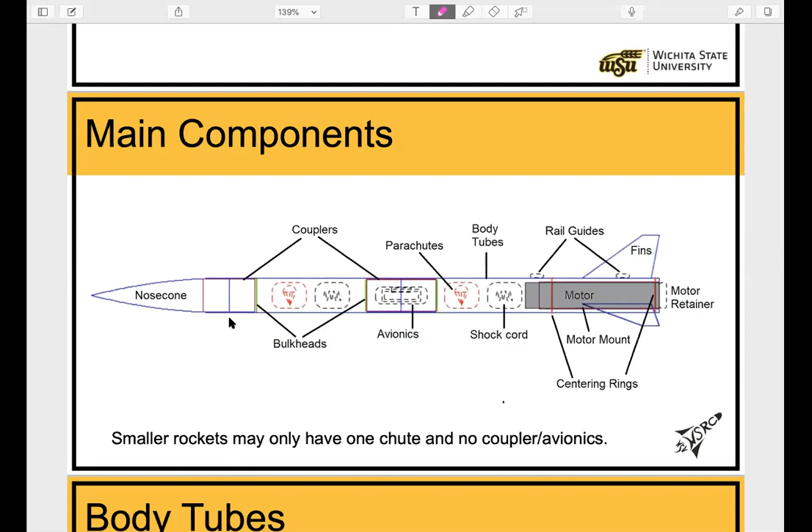All right, so structures and airframe. So these are some of the main components that every rocket has. So this is a traditional dual deployment setup. It has a nose cone and a coupler that is attached to the nose cone. It is removable from the fore section of the airframe. I just realized I can use this pen. Okay, can you guys see everything on the screen? Yeah. Okay, yep. So this would be the fore section, and this nose cone slides into that fore section right there.

And the avionics bay is pretty much just a coupler that fits into the aft section, or the booster section, which is that. That's the fore section, that's the aft section. Yeah, so these are pretty much the main components. Every booster section would have a motor tube, so that you can fit the motor in it. We would also have centering rings to keep the motor centered, so the line of thrust is aligned with the rocket, and you're also going to have a bunch of fins on the rocket. This is in order to keep your center of pressure behind the center of gravity.

So this avionics bay is attached. Usually, it's attached to the fore airframe. So you're going to have a bunch of screws in here that would be attaching this coupler avionics bay to the body tube. And the way the booster section or the aft section is attached to the avionics bay is via shear pins, which break off when the ejection charge fires. And the nose cone is also attached to the fore airframe using these shear pins.

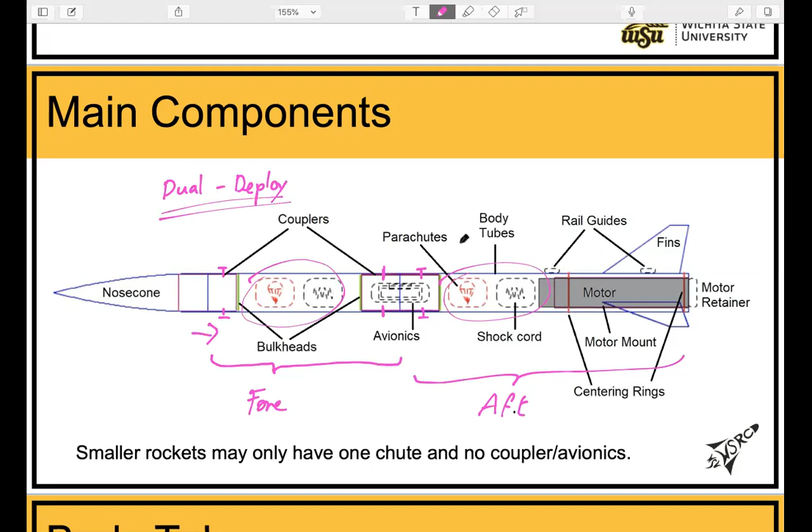Okay, so yep, this is a traditional dual deploy setup, which means there are two sets of chutes, usually the main and the drogue. And we usually put the main in the fore section, not in the aft section, just because it's a little heavier and you want to keep the center of gravity further up. Although I have to mention that pretty often the aft section has a lot more space, so that's something to keep in mind.

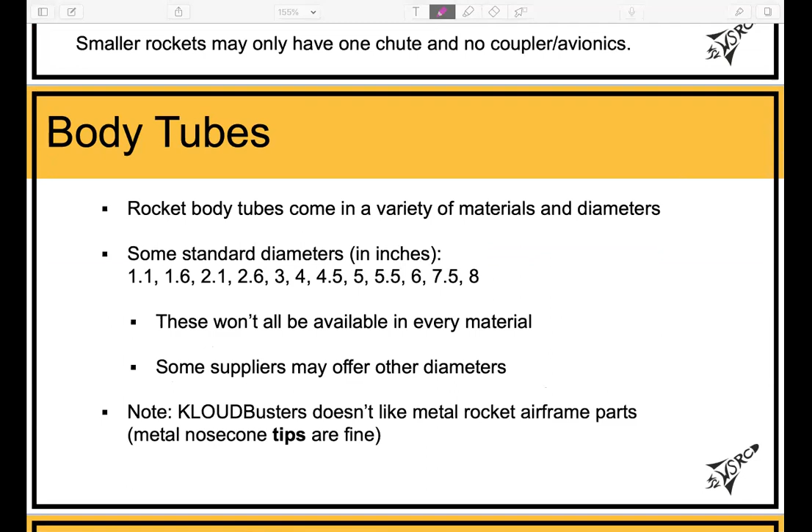So on the body tube, most rockets that you see here in the lab are in the range of 3 inches and above. I think what's his name again? Scott? Is it Scott's Black Arrow? I think it's like a minimum diameter, about 2.6 inches. My rocket. That sounds right. Yeah, mine would be a 4-inch diameter rocket, and I have it here with me. I can show it to you. So yeah, 4-inch diameter. If you really want to put a payload in it, whether it's a glider or a drone, you usually want to go 6 inches and above.

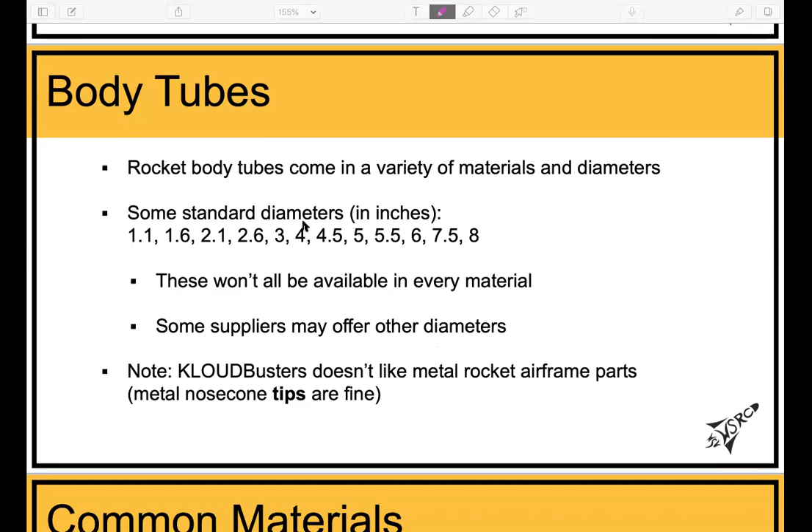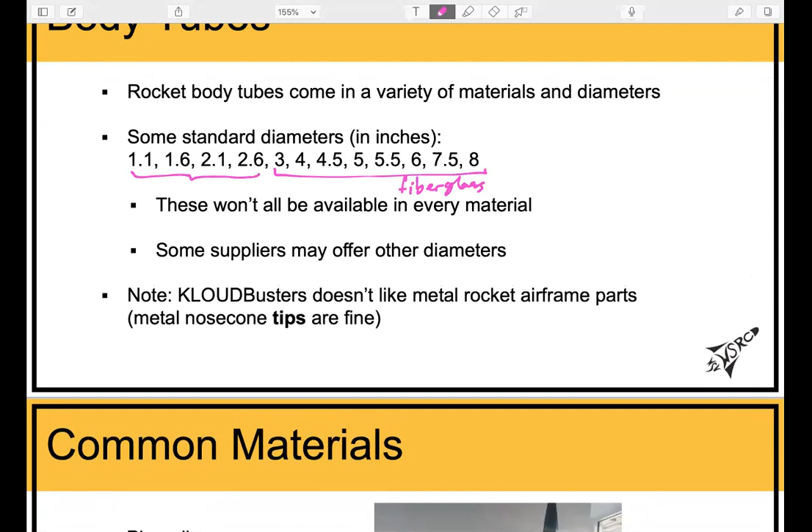And usually the larger diameter rockets, I would say 3 inches and above, could be found using fiberglass. And some of the smaller diameter ones are most probably cardboard. Cardboard, yeah. Also, KLOUDBusters doesn't like metal rocket airframe parts. So no metal body tubes, no metal airframes.

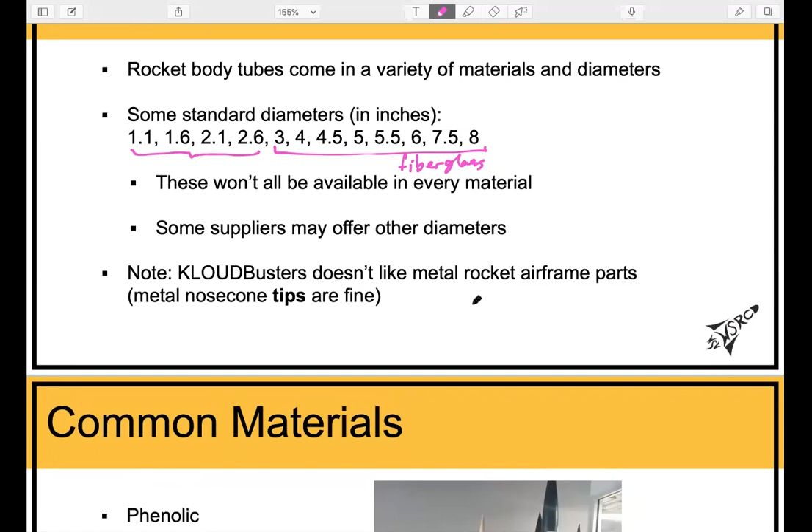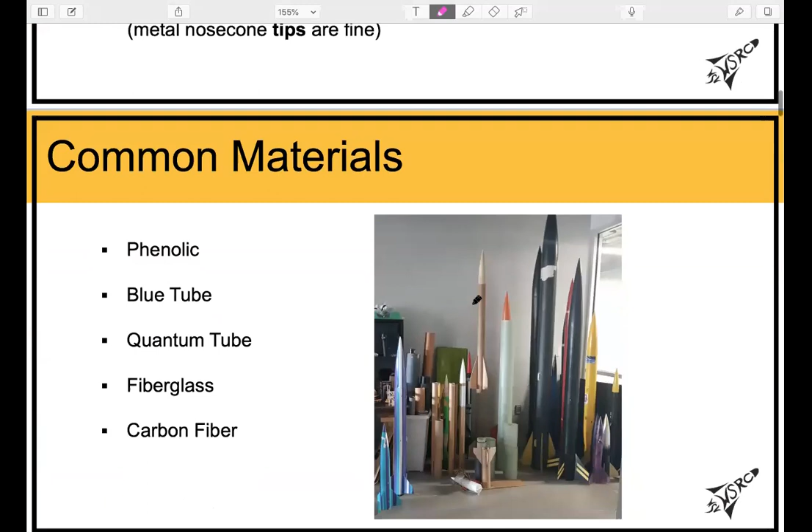I think we have one rocket here in the lab that belongs to Tarun. Do you guys know Tarun? He was part of the very first FLI team here from Wichita State University, and his rocket had metal fins on it. I should ask him. Yeah, KLOUDBusters hated it. Yeah, so this is, again, just some of our rocket lab, our astronautics lab.

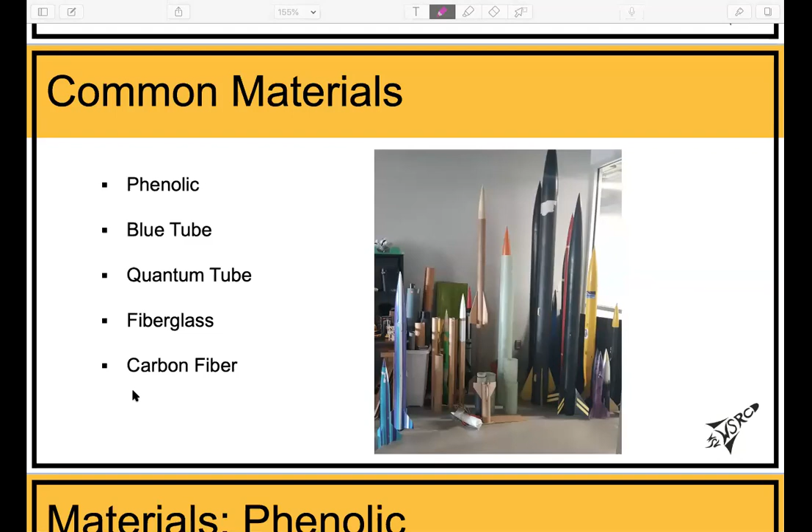So here are some common airframe materials. So phenolic tubing. Is there more? Yeah, here. So these are used for smaller subsonic rockets, and they can be used for motor mounts as well. They are cheap. As you can see, they kind of look like cardboard. So they're a lot easier to cut, a lot easier to paint, and much more affordable compared to fiberglass or carbon fiber.

They're also a very good base, which is what I'm planning to do with my level 3. So you can use this as a base, and you can lay up fiberglass or carbon fiber around it, as opposed to just buying a filament wound carbon fiber tube. So that's also one of the advantages of it. So it can be used as an airframe on its own, or it can be used as a base material for your fiberglass or carbon fiber rockets.

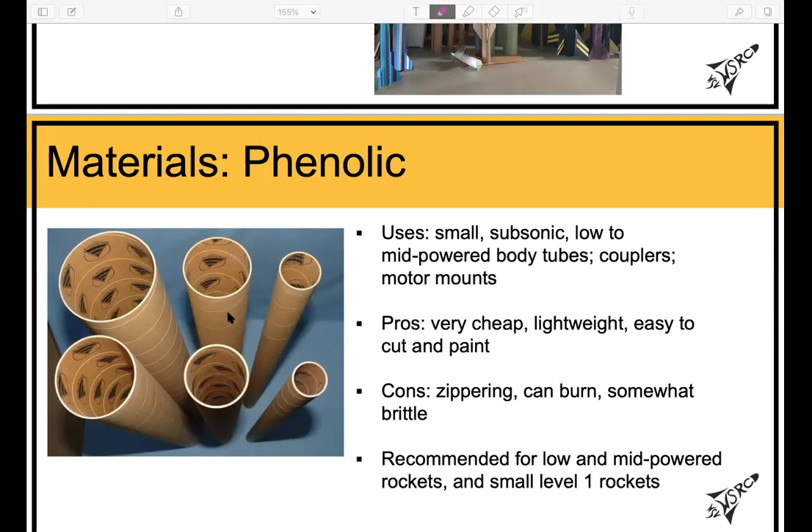Oh, next we have Blue Tube. So are you familiar with this one? Because I'm not too familiar with it. If you want to explain about it. It's basically tougher phenolic. It was used a few years ago. We've still got some in the lab. If you look around the materials, there's some lying around there.

Oh, I think I see some of them. Yeah, it's just literally the blue phenolic. It's tougher, sturdier. I think they bill it as like 5 times tougher. It's pretty good overall. You might actually consider using that as your base. It'll be a little bit heavier though than phenolic, but it is a lot sturdier. Well, I'm trying to break the WSU altitude record, so maybe you might go with something lighter.

So again, just to reiterate, the pros: it's cheap, easy to cut, lightweight, it's sturdy. Some of the cons: zippering. So if some of you don't know what zippering is, basically the airframe would have a shock cord passing through it. That's how we tether all of the different components together. So you would have a shock cord

that goes through. And sometimes if your parachute gets deployed when your rocket is descending at a very high velocity, the shock cord can actually rip through the airframe. So you would get a rip right in here, and your shock cord would basically penetrate through the material. So that's what zippering is. There are some techniques that you can use to avoid that.

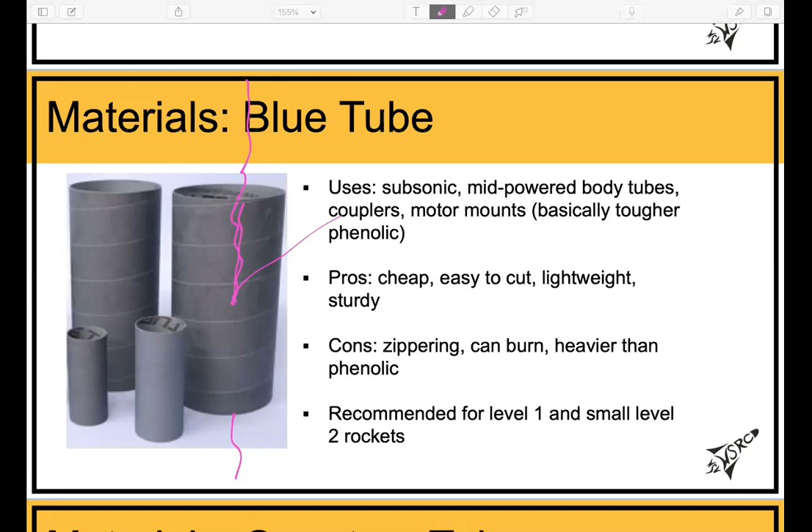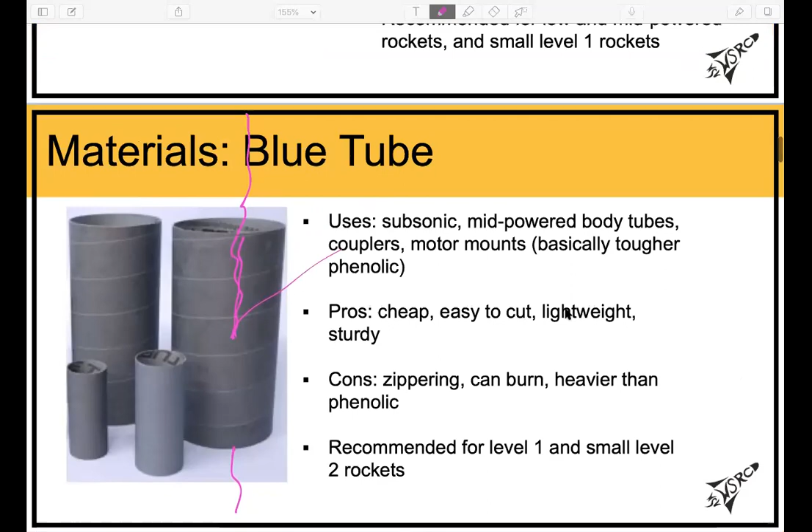Usually doesn't happen on airframes that are a lot stronger, such as fiberglass or carbon fiber. And they can burn. And like I said, they're heavier than phenolic. Phenolic can burn too. It's all cardboard. Well, not technically, but. And next is Quantum Tube.

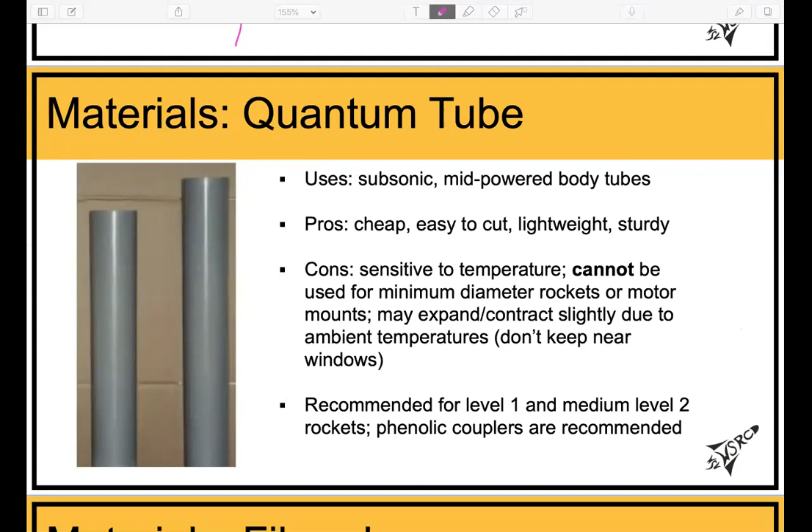So again, they're definitely a lot stronger. They're used for subsonic rockets, but I think Scott's Black Arrow rocket, he used Quantum tubing, and that rocket went supersonic, I believe. Yep, they're a lot cheaper than fiberglass, carbon fiber, a lot easier to cut as well. You don't have to wear respirators like N95 masks and all that fancy stuff. You're not gonna get as much intense dust during the build process.

So some of the cons is that it's like strong PVC. Yeah, right. So when I first came to the Rocket Club, I was looking at some of the rockets that had Quantum. And I was like, is that PVC pipe? Because it really looks like it. But yeah, it is like PVC pipe, but it's a lot stronger than it.

Okay, we're on to fiberglass. So these are pretty much, assuming your rocket is not going ballistic or anything, these rockets pretty much last forever. They are extremely durable when it comes to drilling, and compared to phenolic or cardboard, you're not going to get as bad of a blowout if you drill through it.

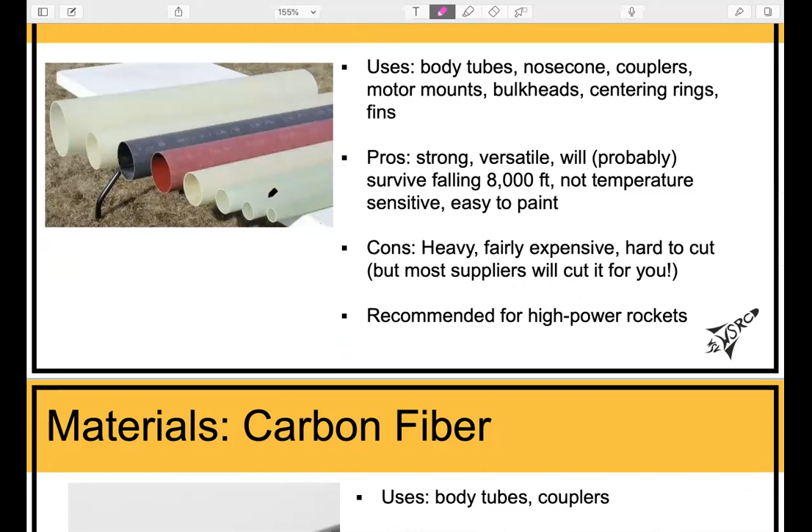And these materials can be used pretty much for the entire airframe. So you can use them for the motor tube, the bulkheads, the aft and fore airframe, the nose. They can be used for everything. I pretty much used that for the entire airframe. And I have time-lapse videos that I can show you guys later because I filmed the entire build. Wow.

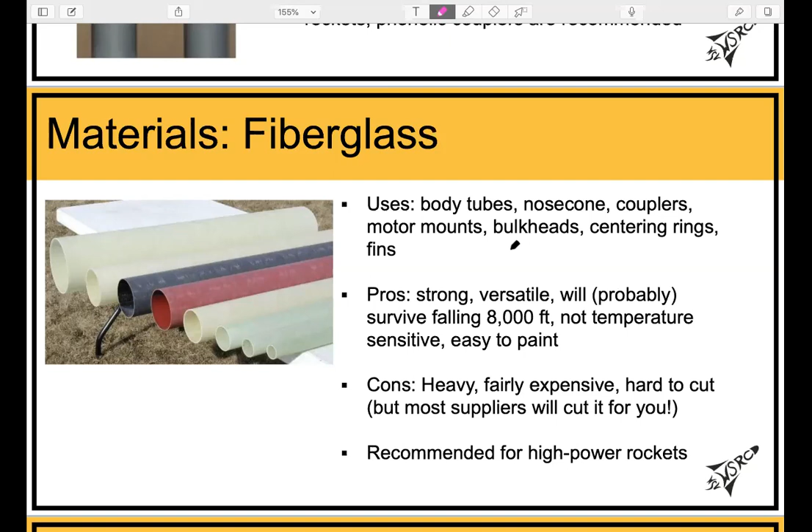They are fairly expensive. For example, the airframe that I got for my level 2 rocket, I got it off Madcow, and the total price came pretty close to about $400, and that's for a 4-inch diameter airframe, 4-inch diameter nose cone, 54 millimeter motor tube, and I got the fins cut out by Public Missiles. They are another company where you specify the dimensions of your fins and email them. They'll give you a rate, and they can get it shipped to you pretty quick.

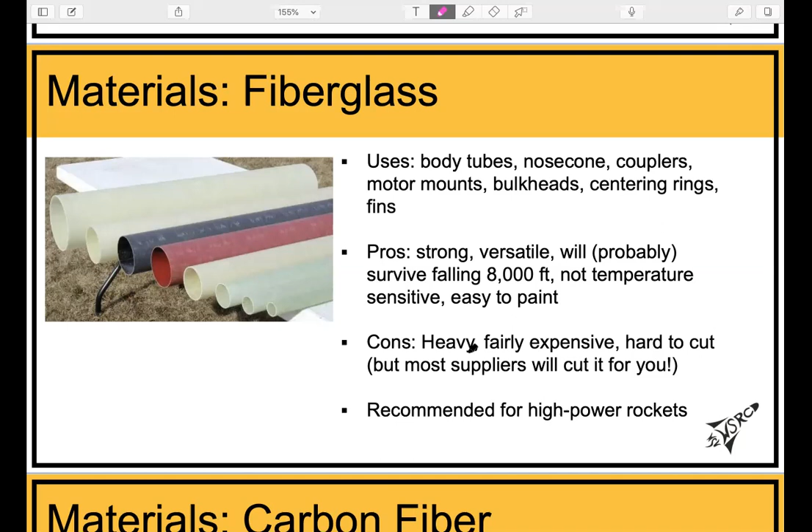So almost all high-powered rockets that are 5, 6, 7, even 8 inches in diameter use fiberglass, at least as the structural component of the airframe. Then finally, we have carbon fiber. So again, if you want to lay up carbon fiber or fiberglass, the process is pretty much the same.

These are available filament wound as well, and you can lay it up as well. They can be used for pretty much any part of the airframe. Madcow has them. Your motor tube, forward airframe, aft airframe. They can be used for fins, nose cones, pretty much everything. Incredibly expensive. I haven't done too many carbon fiber rockets. We have one here in the Rocket Club.

Was that part of a senior design project? Was it? Yes, yeah, it was. You know how much that one ended up costing? Or at least just for... $10,000? I don't think it was that much. I don't remember the exact number though. It was a while ago.

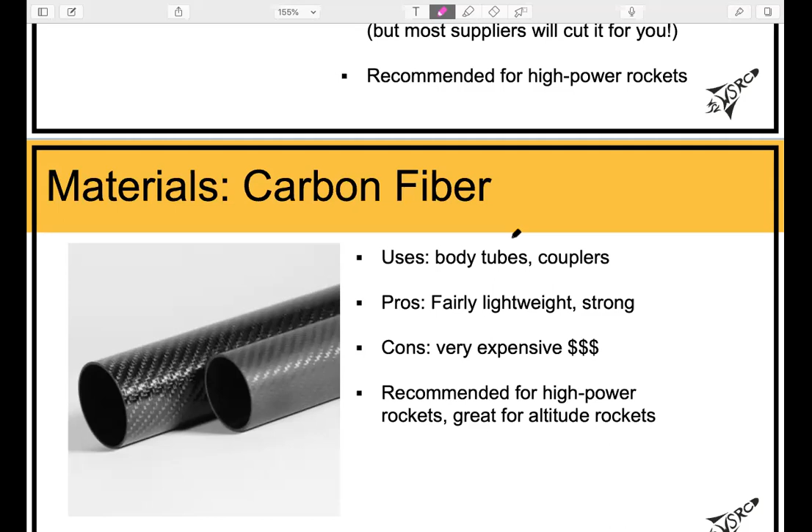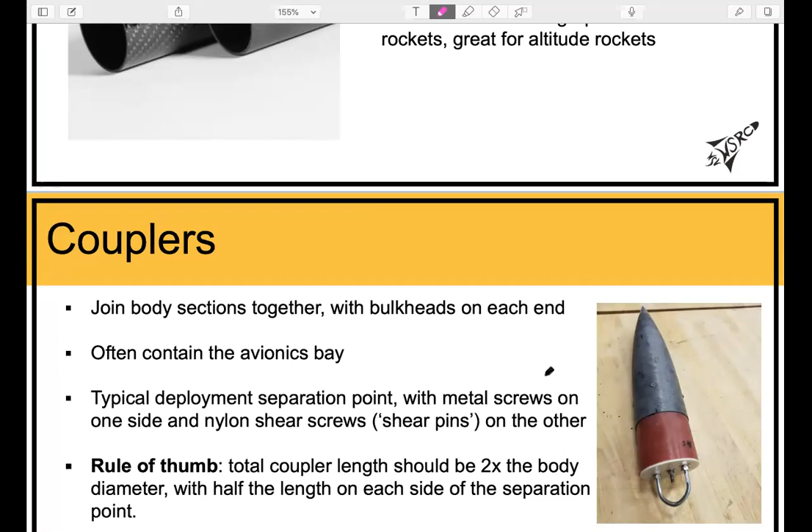That rocket was launched before anybody who's currently in the club ever joined the club. It kind of just stands there now. Still our flagship rocket, or at least the main thing we kind of show off here in the astronautics lab. Yeah, that's the current club record for altitude, 16,500 feet. So, just bring it over. Yep. Again, recommended for some of the most high-powered rockets that you can imagine, great for altitude rockets.

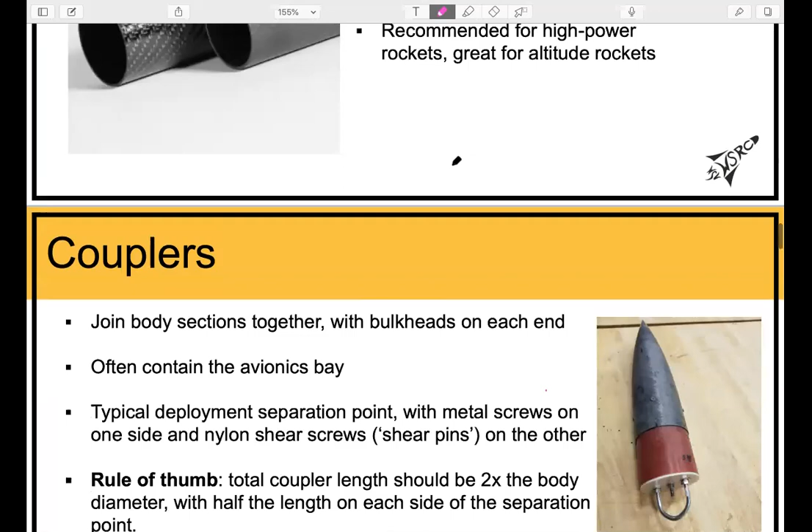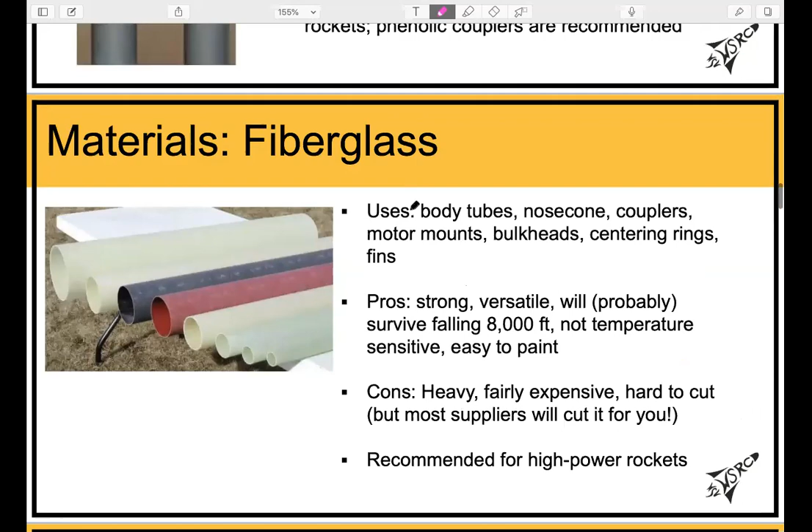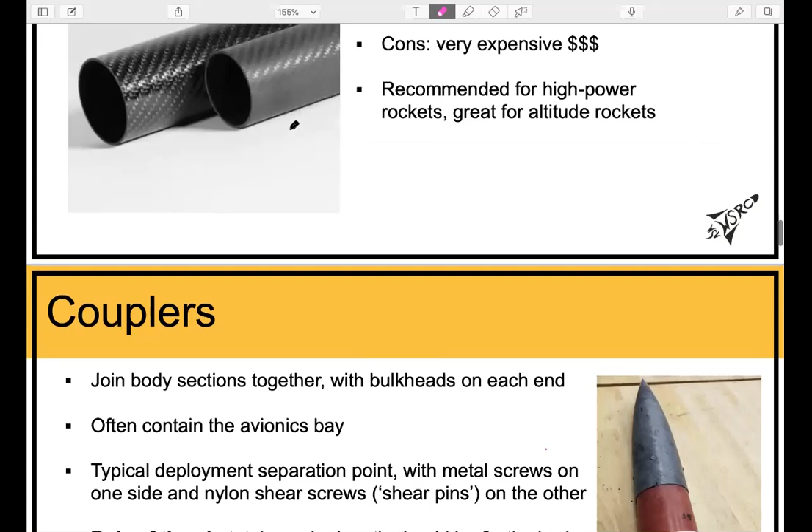My favorite airframe material, I would say, is fiberglass. It's relatively affordable, and assuming you're not gonna fly like Mach 2 or Mach 3, it should do just fine. So, fiberglass can do above Mach. It's pretty good for those. Yeah, they can go above Mach 2, but if you're gonna stay at that speed for a really long time, I think carbon fiber would be a better option. Well, carbon fiber is always a better option. It's just nobody has the moolah for it.

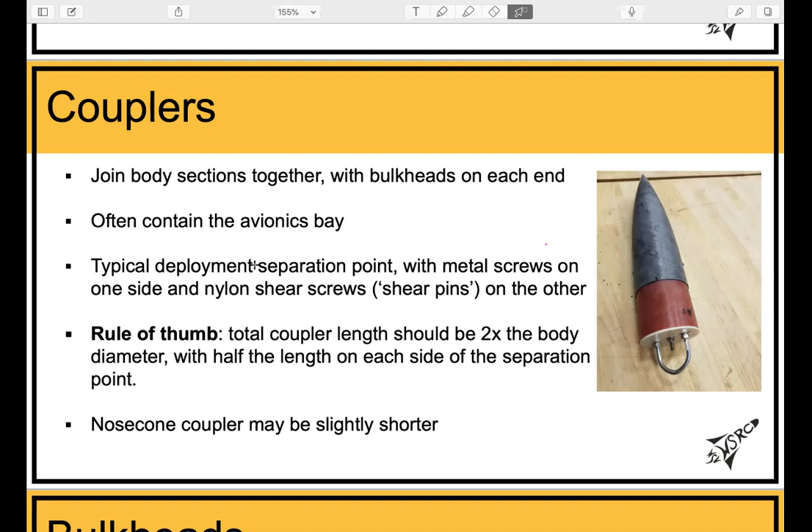So here we're gonna talk about couplers. Again, as the name is pretty self-explanatory, you join body segments together, bulkheads on each end.

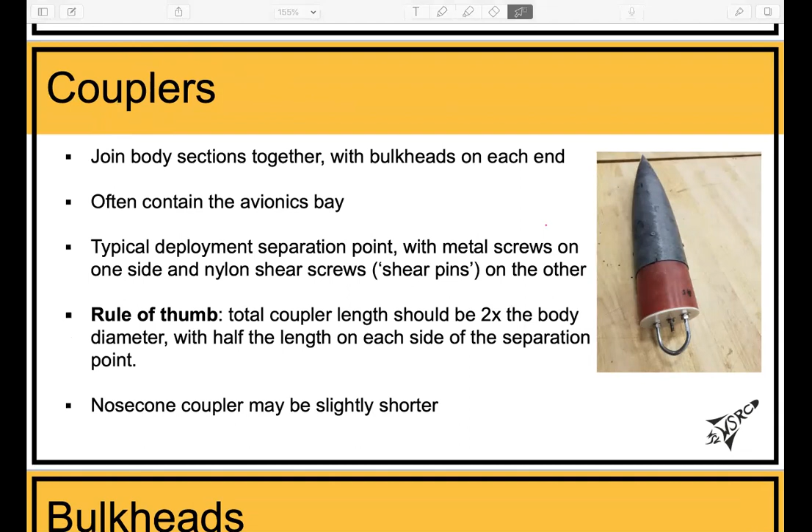So can you see? Are you seeing the screen, or can you see what's on camera? We're seeing couplers. Okay. We can see your screen on the side, if that's what you're asking. Oh, so you can see both of them at the same time. Right. Nice. We only see the couplers slide.

Yep. So, coupler. Pretty self-explanatory. They are used to join different rocket sections together, and each of them have a bulkhead on each end, like this one right here. This is the nose cone. That's a bulkhead, and it is attached using the all-thread, the threaded rod that passes all the way through from the nose cone tip, the metal tip, all the way to the back of this bulkhead. And you want a bulkhead to ensure that your parachute bay could be pressurized for deployment.

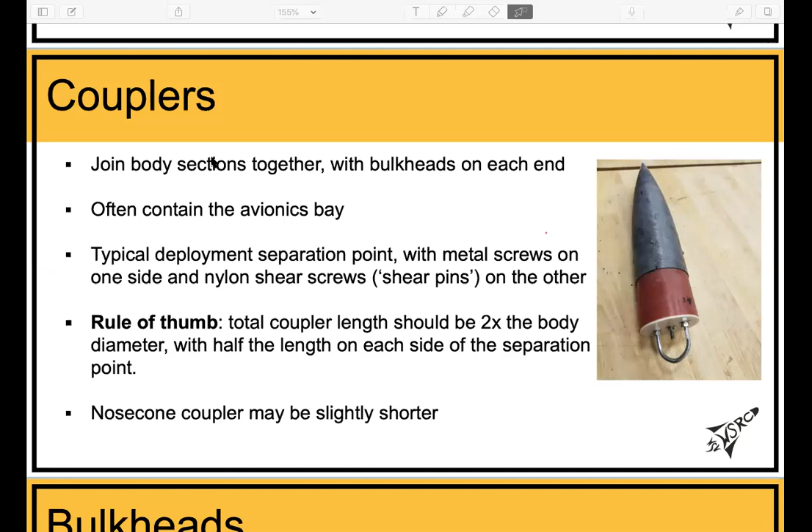And of course, they are used so that you can attach U-bolts over here, so you can attach a parachute on it. I don't have a U-bolt for mine. I put a little eye-bolt on it, and I attached it to the thread. So a rule of thumb, the total coupler length should be at least twice the body diameter. We don't really have a photo up on here, but I can show it to you on my rocket.

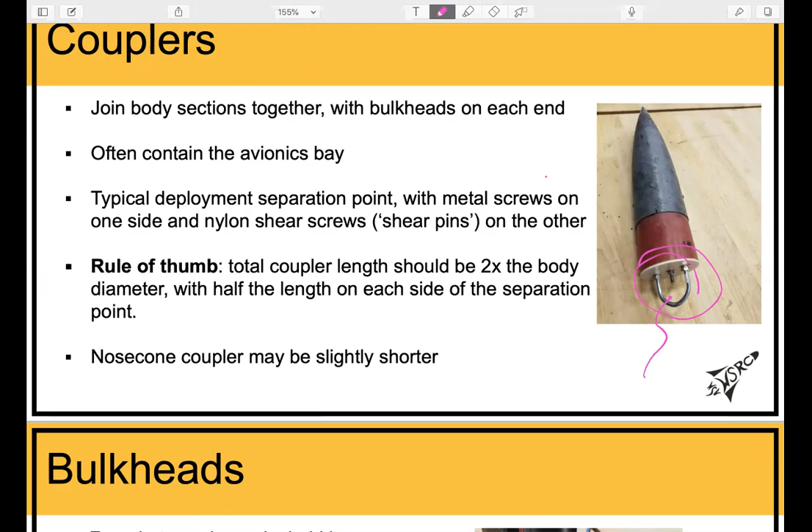Can everyone see this? You guys see the camera?

Mm-hmm. Yep. So again, the rule of thumb in the slide says that the coupler length should be twice the body diameter. So this coupler fits into the 4-inch body tube, and it's about 8 inches long. So the end's about right here. Again, the diameter is 4 inches across. You want the coupler to be 8 inches. So each end that goes into the airframe is 1 body diameter.

And for the nose cone, I believe it doesn't have to be as long. Half of it is fine. So for mine, 2 inches would be perfect. I think the competitor 4 nose cone coupler is about 6 inches long in total. Oh yeah, just for reference. Yeah, the one on my nose cone is also slightly longer than 4 inches. So you don't have to go that long. It's not a must, but the minimum for the nose cone coupler is at least half of your body diameter.

All right, can everyone see the screen again?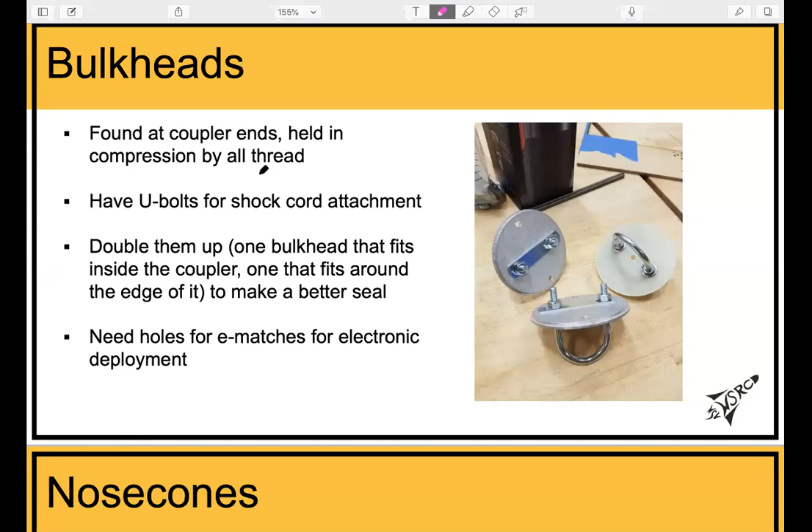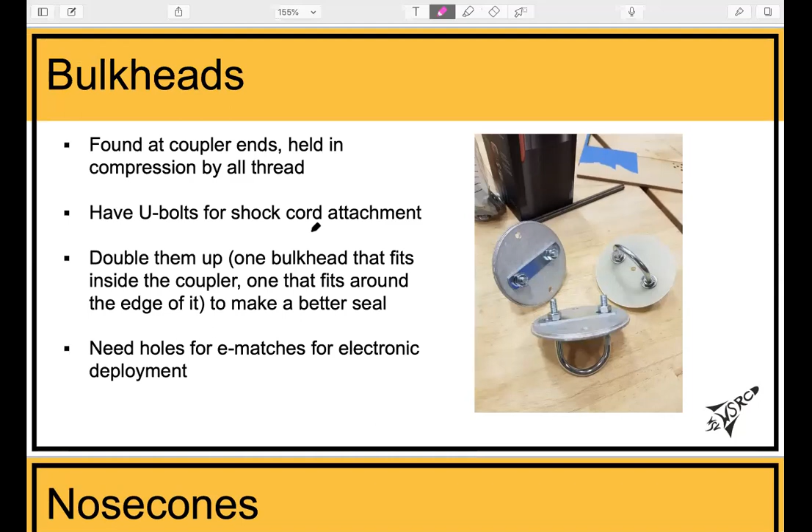So here we have the bulkheads. They are incredibly important, especially for your avionics bay, because the ejection charge is extremely corrosive and you don't want to damage any of your electronics. So this is a very important part that I don't think many people actually know about. You actually need two bulkheads on each end of your avionics.

Thanks, Sai. You taught me this.

So one bulkhead would fit inside your coupler, and another one would have a diameter that is slightly larger that would sit on top of your coupler. And this creates a much better seal to prevent any of the charge gases from coming through.

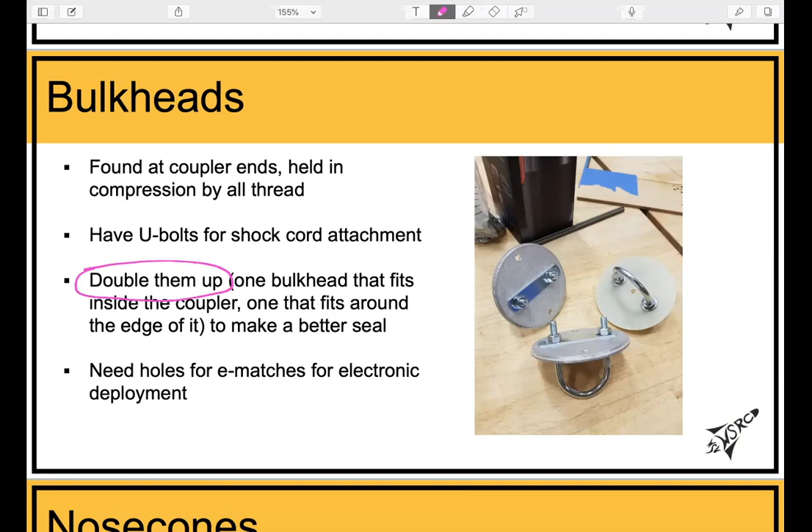So if I were to draw it, this would be your airframe. This would be your coupler. So your first bulkhead would be the diameter of your airframe, and the second one would fit inside the coupler, just like that. And you stack both of them up together.

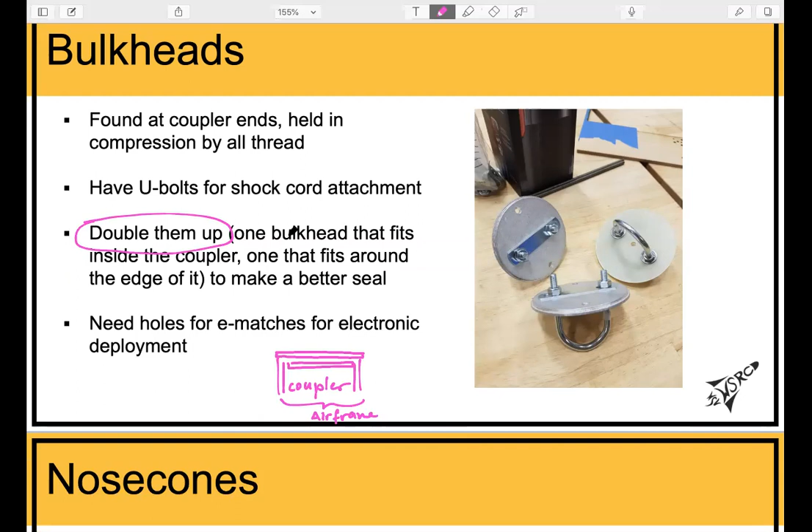And again, you need holes for E-matches. You're gonna have wires passing through so that you can attach the E-matches, and so that they can be inserted into the canister, which will hold all the black powder charges.

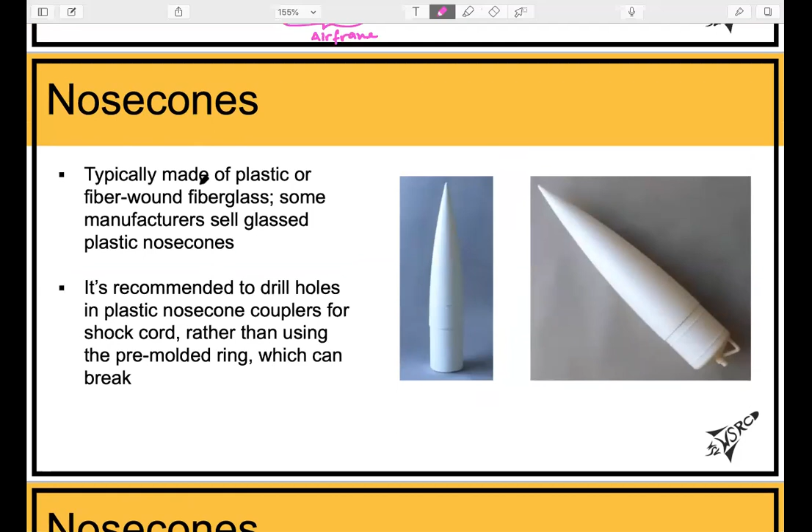Again, here nose cones, they are either made of plastic or fiber-wound fiberglass. Yeah, tongue twister there. If any of you are familiar with our Cert 1 kits, here it says it's recommended to drill holes in a plastic nose cone rather than using the pre-molded ring. The pre-molded ring, oh, there it is, right here. It's very narrow, and if you're gonna have a lot of tension on your shock cord, it might break apart. So it's recommended that you just drill a hole right here and pass your shock cord through.

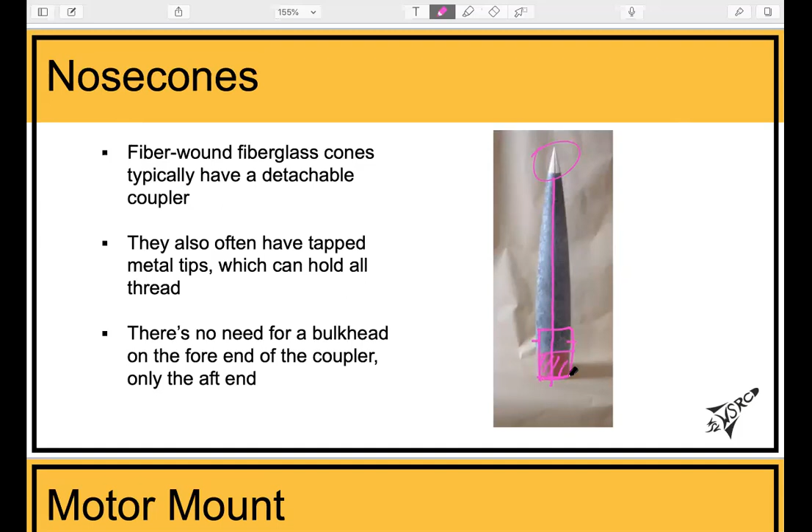So here we have fiberglass nose cones. This is the metal tip, and you're gonna have an all thread passing all the way through. This is your detachable coupler, and you're gonna be attaching it with screws to the nose cone. This end would fit inside the airframe. And again, you're gonna have a bulkhead on the aft section of that coupler.

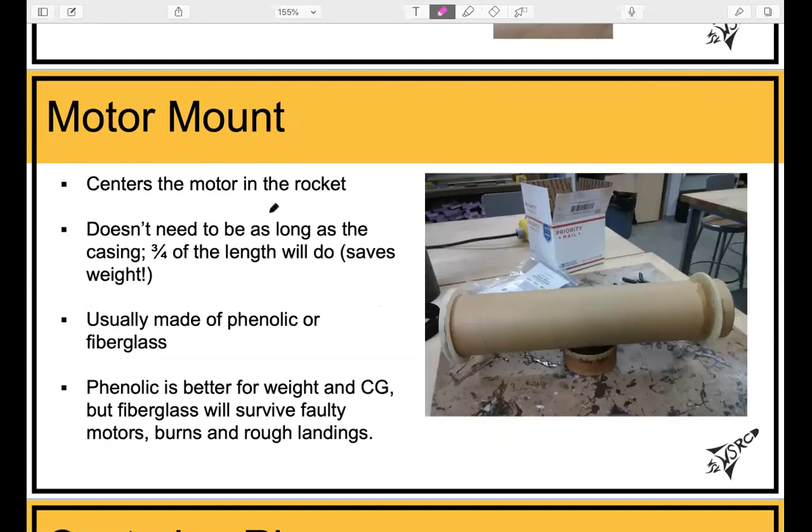So this is the motor mount. This is what keeps your motor centered within the rocket. It doesn't need to be as long as the casing. Sometimes the casing can extend much further compared to the motor tube. This one out here is made of phenolic. I believe this one is used on our Argonia Cup rocket. Is that right, Sai? Yep, that's correct.

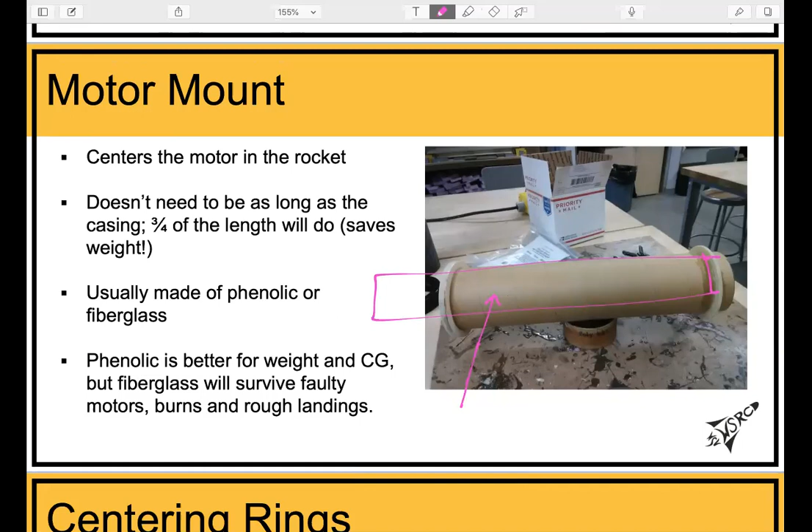I'm curious as to why you guys didn't proceed with fiberglass. Yeah, we thought we knew better. And it did work for most of the launches. Then we got to the last Airfest it was launched at, and you saw how that went.

I wasn't there. We didn't launch it. I think I went there. Oh, you weren't? And then decided not to launch it. Oh, well, you can look at Hope right now. You can take a look at the fins and see what happened. I'm looking at it right now.

It's explained right there. Phenolic is better for weight and CG, but fiberglass will survive incidents like that. Yep, as mentioned, if you design your rocket well and build it well, phenolic will work. Right. Sorry. Right.

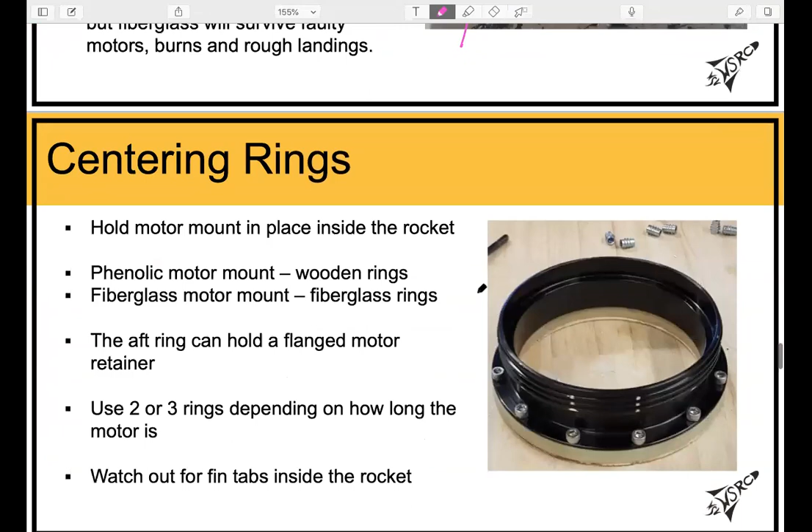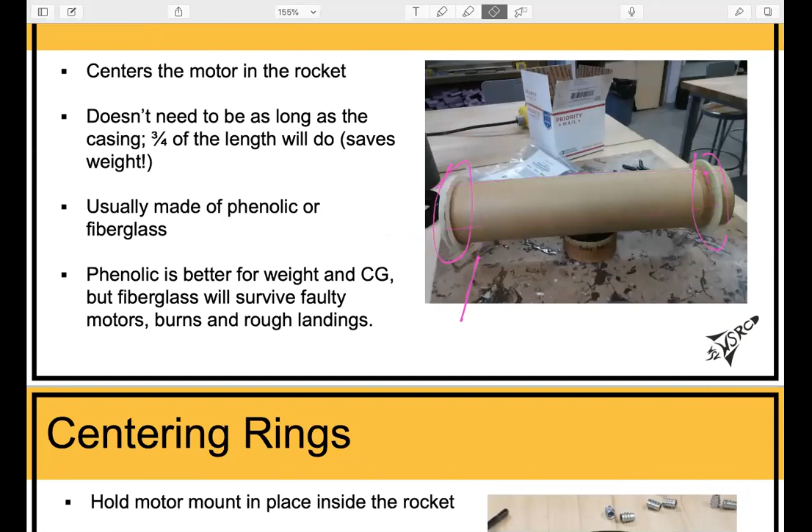So centering rings. These are, see these little discs right here. Those are the centering rings. That keeps the motor tube centered within your booster section. If you're using a phenolic motor mount, you're going to use wooden rings. I believe this last one is a wooden centering ring. It looks like it's wooden.

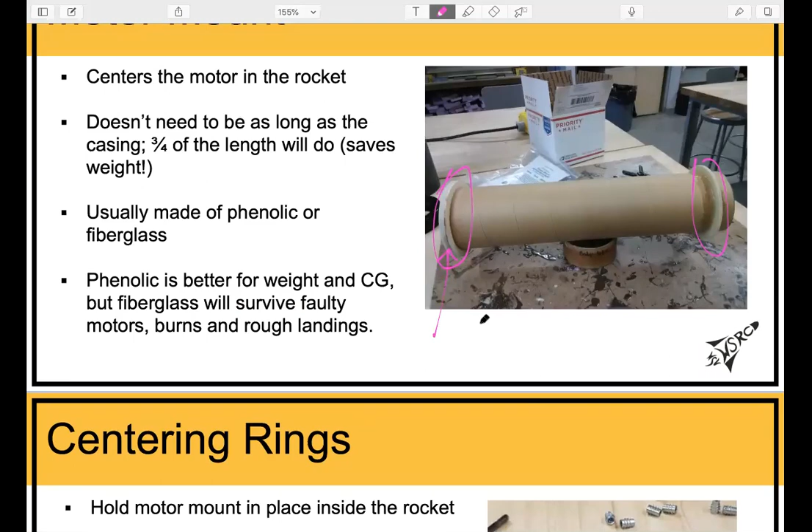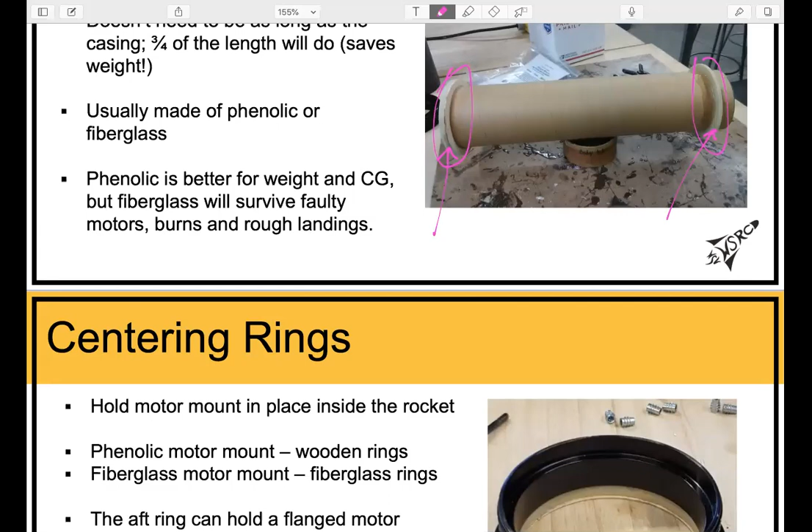We used a combination for Hope. You can actually see it in this one. We used fiberglass sandwiched with wood, so we'd have something better for the aft section, for the motor retainer to bite into. So that was a bit of a special case there.

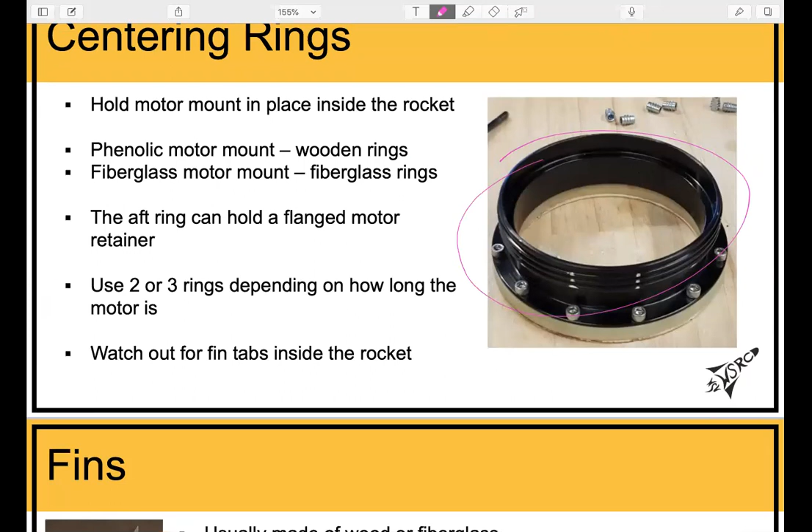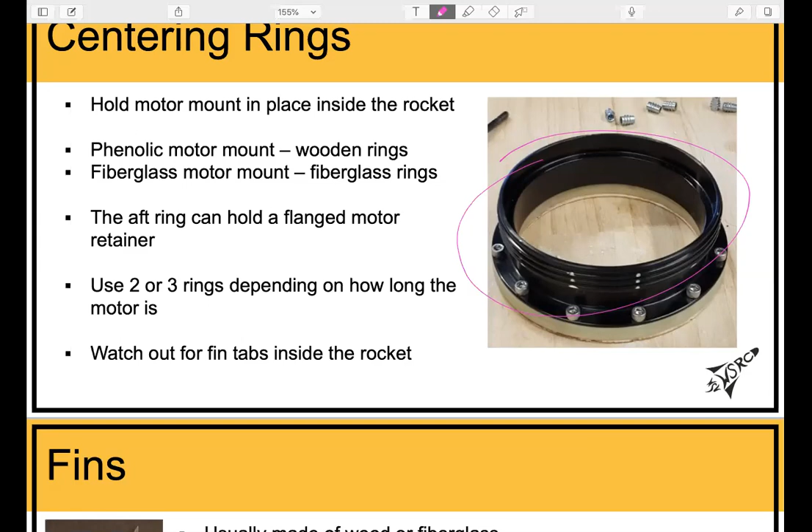So yep, motor centering rings, they're pretty self-explanatory. You might be wondering, what's this big thing up here? This is the retainer for the motor tube. The rocket motor casing is attached just by sliding it into the motor tube, and if you don't have any way of holding it in place, it will just slide back out. So this retainer fits on the aft section of your centering ring, and then you have another section that just screws on top, and it keeps the motor casing nice and snug. I actually made a really dumb mistake on my level 2 rocket that I can go through later on.

So the fins, they're made out of wood or fiberglass. If your fins are made out of wood, all wood has a grain. Your rocket is going to be traveling this way. You want the grain to be perpendicular to the direction of travel, if I recall that right. So if you were to pretend this was a wood fin, you want the grains to be this way, like that.

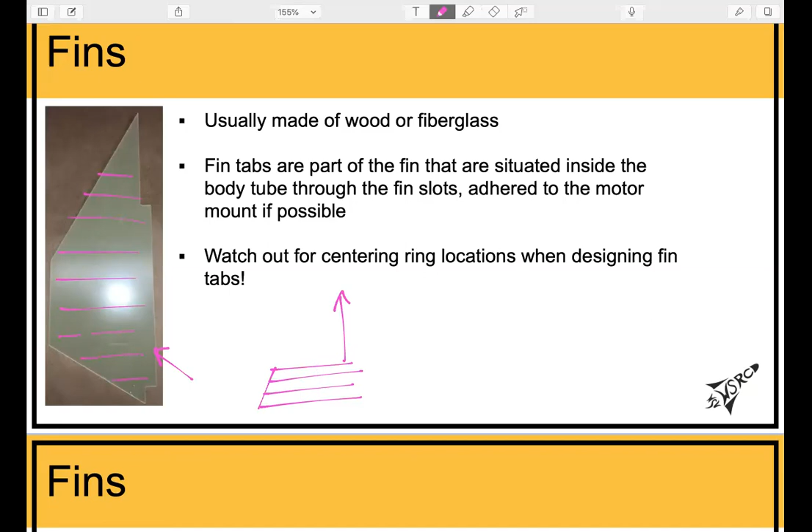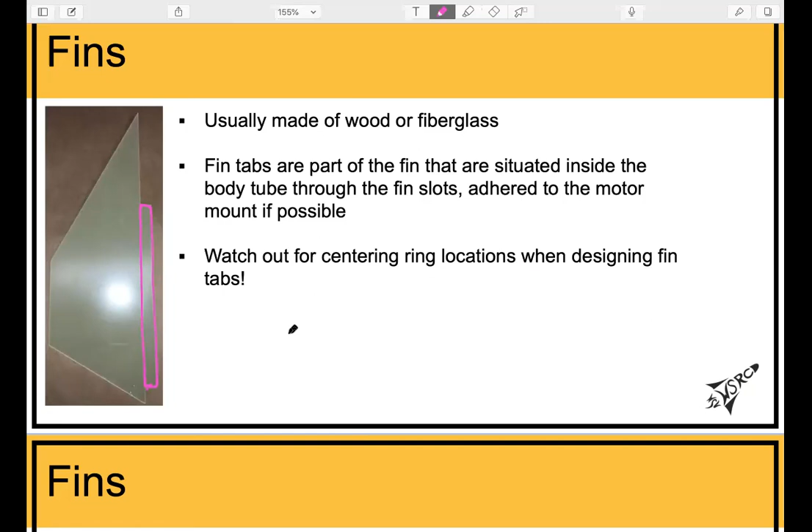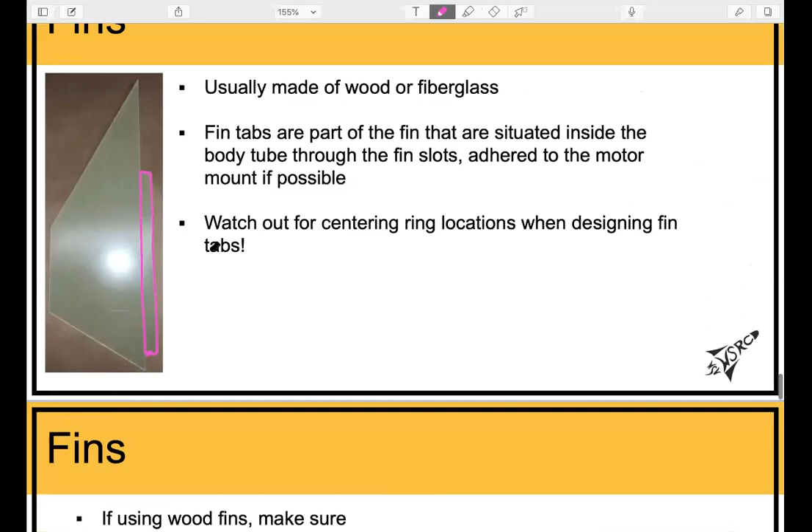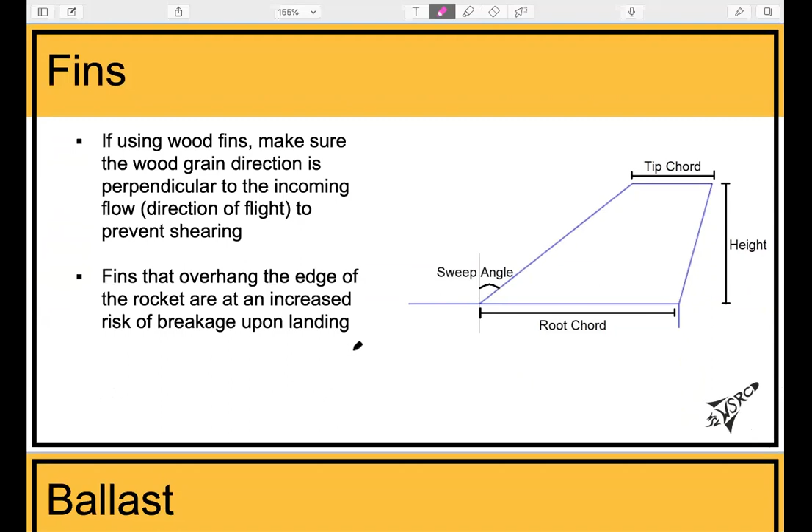Again, these are fin tabs, this section right here. If you don't have a minimum diameter rocket, that means if your motor tube is a lot smaller than your overall diameter, you would want to have fin tabs, just because 2 attachment points is a lot sturdier than 1. Oh yeah, here: if using wood fins, make sure the wood grain direction is perpendicular to the incoming flow. And sometimes these tabs are also called the tang. I think that's what Public Missiles uses. Again, these are the basic dimensions used to specify the geometry of your fins if you want to get them cut out by a third-party manufacturer.

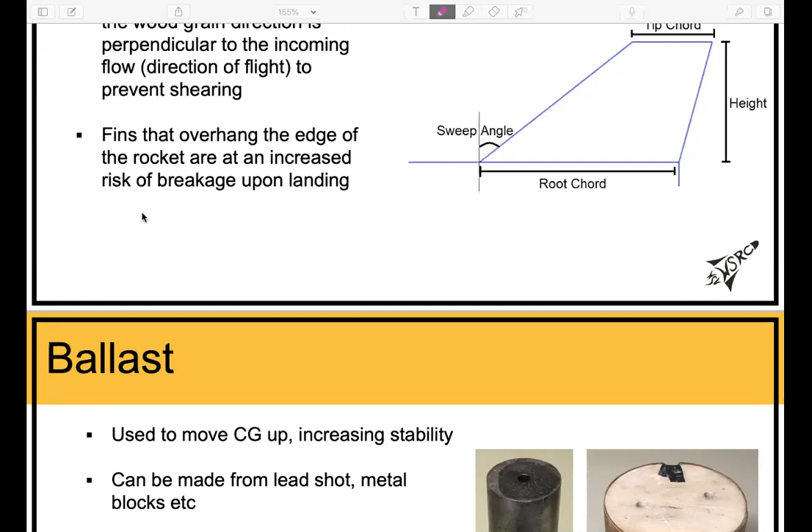Oops. My screen kind of stopped responding. Are you guys still seeing my screen? Yes. Okay, let me go on that again. Can you see the slides? Oh yeah, there it goes.

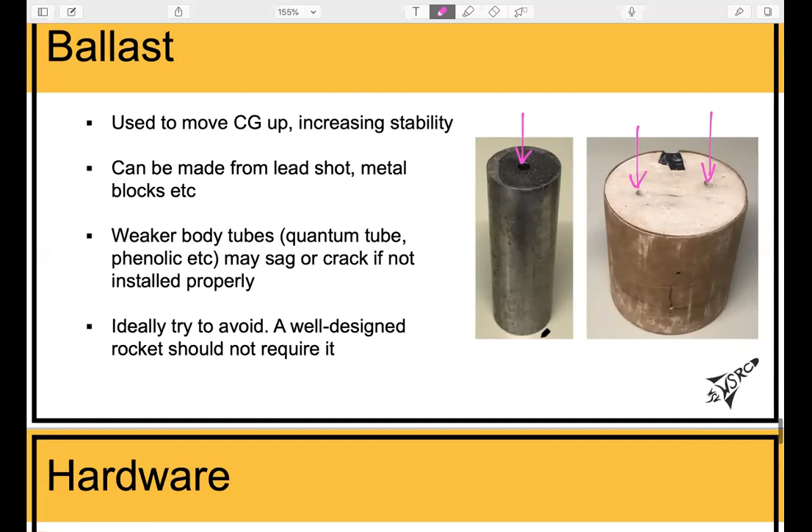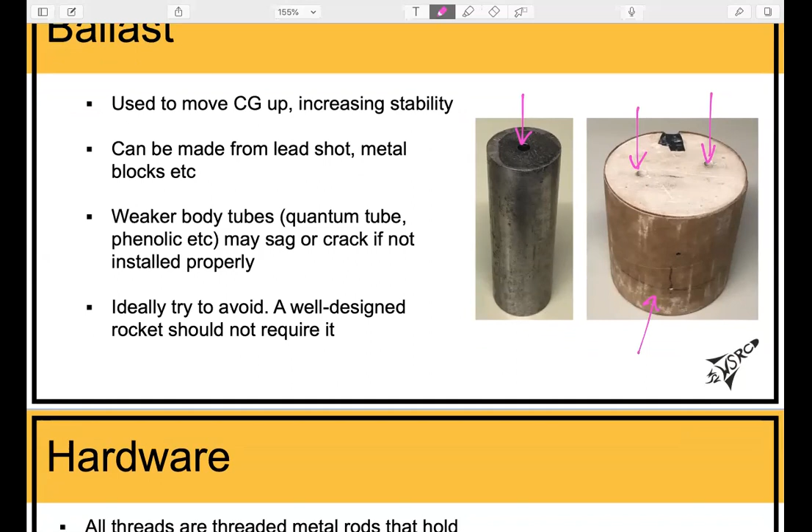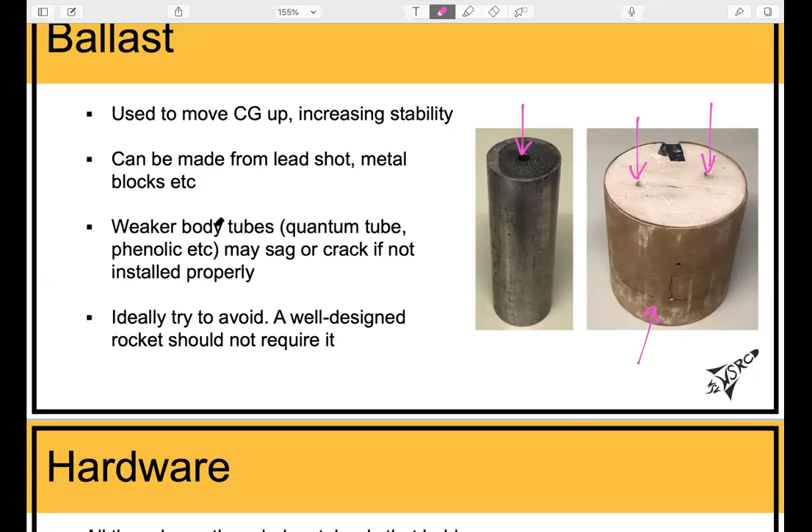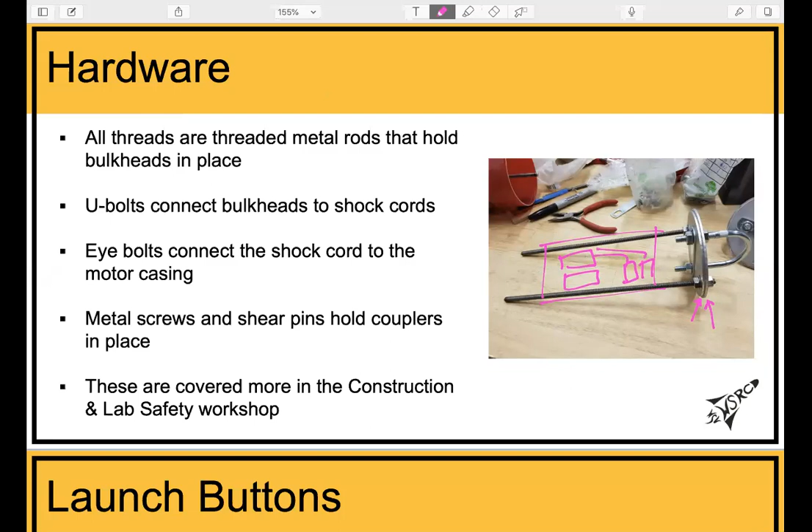Next up on the hardware section, these are all threads, basically really long rods that you can screw things onto, and they are primarily used as attachment points or a mounting point for your sled for your avionics bay. As you can see, like I mentioned earlier, there are 2 different bulkheads on each end. This would be for the avionics bay. In your avionics bay right here, you can mount all of your electronics. You can have 2 flight computers, 2 batteries. You can wire them up. I'm pretty sure I wired that wrong. But yeah, you get the idea.

So rail buttons or launch buttons are used to keep the rocket on the launch rail, and the launch rail is used to ensure that the rocket is traveling straight until it's fast enough so that the center of pressure moves further back.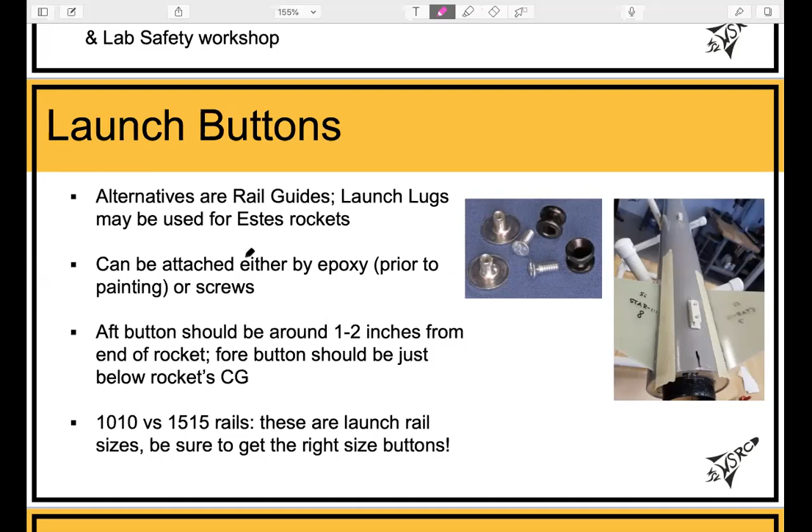And these are... Hey, that's a Callisto kit. Actually, it's not. It's a Tethys. Oh really? Yeah, a Tethys. It's what I tried my Cert 2 on. It looks the exact same. It's beefier. Oh, okay. Otherwise, it is pretty much the same. Is that your rocket, Sai? Oh, it says Sai. Yeah, that's my rocket. I label all of my components. That was the best picture I had of rail guides. So most of these components are mine. All of the other ones you're looking at are my competition kit.

So yeah, what type of launch guides are these called? I don't know, these ones are called launch buttons. Those are rail guides. Yeah, rail guides. And then I didn't have any pictures of launch lugs, I don't know if you want to add one in there. Well, we don't really use them anymore, though. Those are the long tube versions. We used to have them on the Cert 1s. You'll just see all this stuff in the lab. A launch lug is literally a tube that you put on the rail. If some of you bought the Onyx kits, I think they come with a launch lug as well.

So there are different size rail buttons. I think this is like 1 inch and this is 1.5 inches? Is that right? Yeah, it's something like that. It doesn't really matter. They usually label the rails as 1010 or 1515, so you just gotta make sure you have the right ones. I know MTR uses 1515. I think Hope did too.

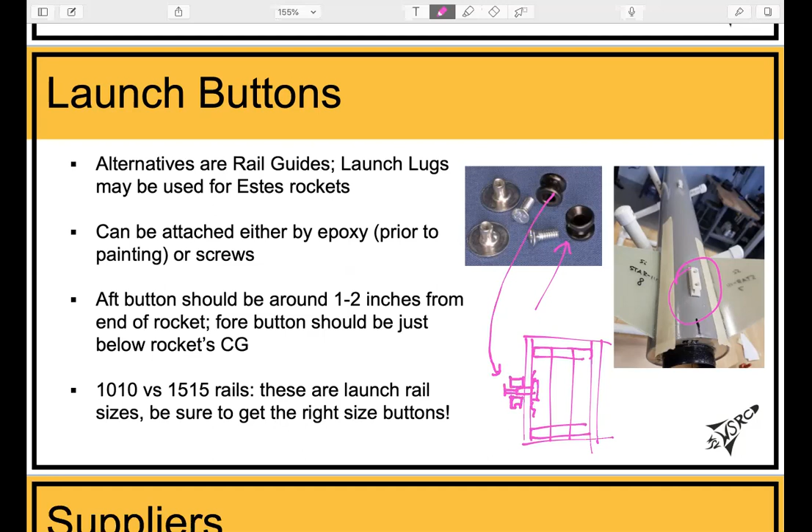So these launch buttons, say this is your airframe. This end would be epoxied on the inside, sticking out just like that. So you want to epoxy this in, and this could be your motor tube. So you really want to plan when you epoxy this section in, because if you don't epoxy them in and you have your booster section, motor tube in, and an aft centering ring in as well, then there's no way you can get that on. So keep that in mind. Then the launch button would fit right here. Horrible drawing. That would be the launch button, the black one. And then to secure that, you would have the screw. And voila, simple as that.

And again, you're going to need 2 launch buttons. The aft button should technically be as far back as possible, but of course you're going to have a lot of other components, such as the aft centering ring. So usually an inch from the base of the rocket. And for the forward button, there's a rule of thumb for it. Basically, you want all of the buttons to leave the rail as late as possible. This ensures that the rocket is still guided by the rail as it accelerates.

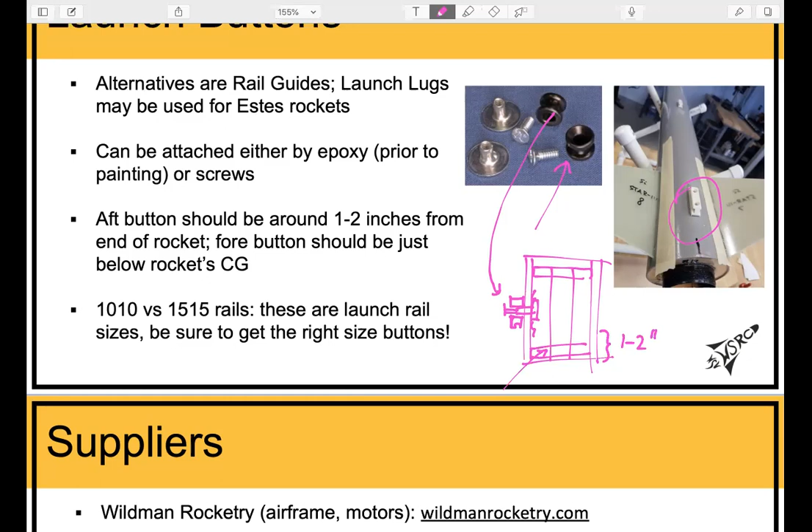Ideally you would want them to be really close, just so that they leave the rail last, when the rocket is traveling as fast as possible. But you would end up with binding issues with that. So I think the number is like, I forgot what that was. I wrote it down in my documentation for my level 2 rocket. I can share that with you guys later on.

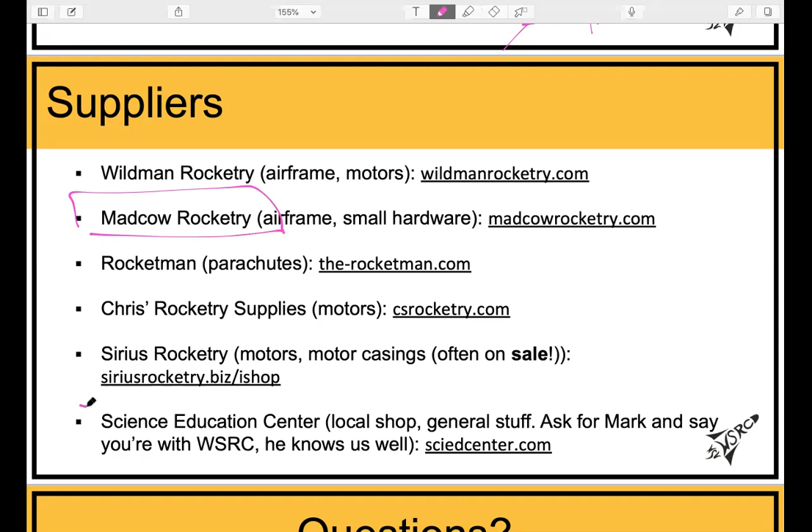Here are some suppliers: Wildman Rocketry, Madcow, this is where I got my airframe parts from. Rocketman for parachutes. Chris' Rocketry Supplies sells a bunch of electronics as well. Sirius Rocketry, I was looking for some closures for my rocket. Oh no, I just dropped it. Closures, because the Rocket Club didn't have a plugged forward closure, which I needed to attach this eye bolt. I didn't get it from them, I got it from Mark from the Science Education Center right here. So these are places where you can find all of the components I was talking about. That's it. Anyone have any questions?

So that's all for the very basic airframe and structures workshop. And we'll get to start building in our lab hours, so get ready. It'll be fun. We'll send out our lab hours tomorrow evening and an email update, so keep an eye out for those. Is there anything you want to do in lab hours that you're curious about learning? Or do you want to get to building?

I could definitely use a little lesson on the different motor retainers. Yep. We have a bunch of different motor retainers here in the lab. This one is from our antenna rocket. This is the flange motor retainer. Yeah, we've got a lot of them, and we can